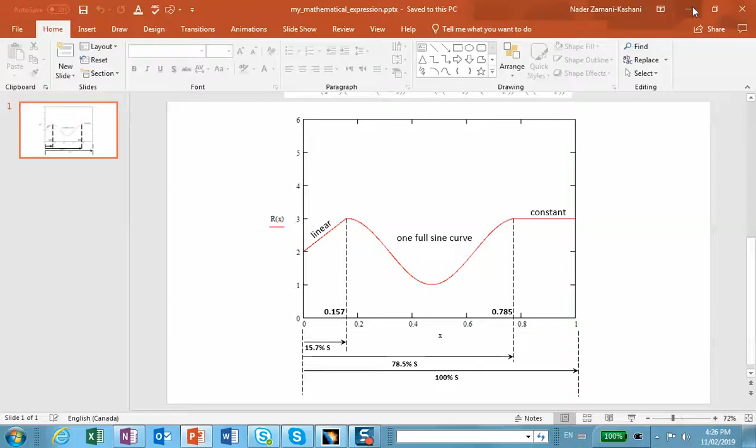Okay, so let's go here. We create a part file. So Control N, P, part. And then we are already in the generative shape design. What I would like to do is to create a law, which can be done either here by going to the knowledge toolbar and then going to F composite G, or you can also go to the knowledge advisor and use the same thing there. This is law number 1.

Now, as you can see in the drawing there, you have two variables. One is the percentage along the length of the center curve, which is real, non-dimensional really, and then the vertical axis is the radius, which I'm going to use inches for. So I introduce two parameters here. One of them is a length type, and I'm going to call it big R, which is the radius. Okay, apply.

And then I'm going to do a new parameter of the type real. I'm going to call this thing x, percentage along the arc. "The law must compute one and only one formal parameter." Okay, fine. I don't know why I'm getting that message, but that's okay.

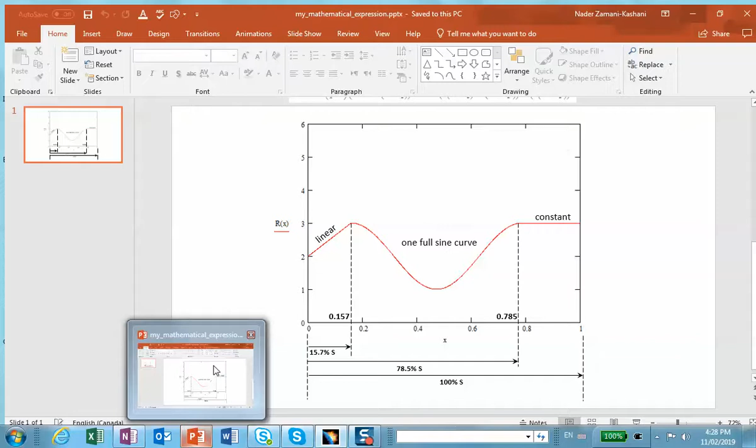So if you look at this sketch, if x is less than 0.157, then it varies linearly according to the equation of this line. Now, I have to be blunt with you. When you are doing things like this, you may have to think carefully about how you're going to write it, how you're going to non-dimensionalize things. So I'm going to write it the way I did it, and if you have a better way, that's fine.

So if x is less than or equal to 0.157, then the radius is equal to, now first of all, keep in mind that the unit of the radius must be length, so inches. So I write a bunch of things here which are non-dimensional, and then I multiply it by 1 inch to turn it into whatever I have in mind.

So 2 plus x divided by 0.157. This is a non-dimensional entity, and then multiply it by 1 inch. Notice what this says is that when x is 0, radius is 2. When x is 0.157, then radius is 3 inches. Okay.

Else, if x is less than or equal to, let's see now, 0.785, then the radius is given by that full sine wave that you saw on the PowerPoint slide. So we're going to write it down. 2 plus sine of x, multiplied by, now notice that the argument of sine must be in degrees because my unit is in degrees, okay? So whatever I write after sine, when the parenthesis opens and the parenthesis closes, must be in degrees.

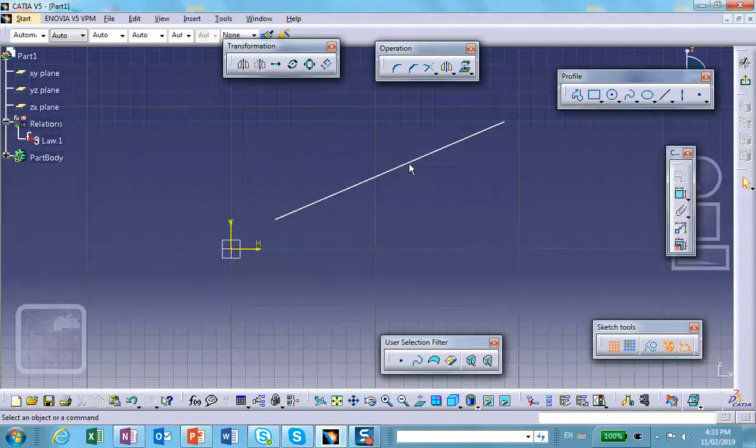For now, I'm going to make it a line right there. Okay. I don't know what the length of it, and I don't care. In fact, I'm going to change this thing later on to an arbitrary curve. So exit. Now we do a sweep, which was right here. Circle, center and radius. So the center curve is right there, and the radius is not a constant, but it's following my law. So I click on the law.

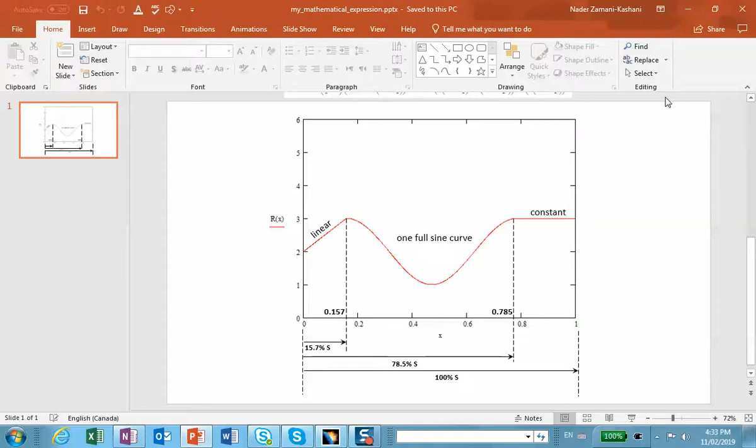Okay. And then I say advanced, right there, and this is exactly the shape that I have on my slide, right there, linear, full sine wave, and a constant, and the numbers are agreeing with what we had there. So remember, you need to select advanced. You have to select the law that you created, and then okay.

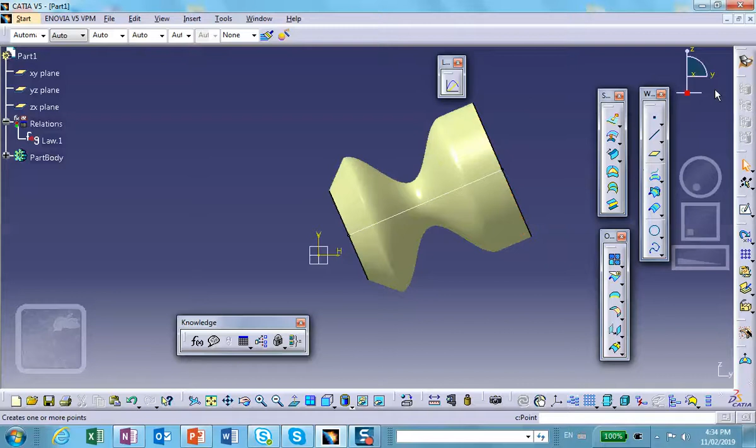All right. So if you look at the front view, we see exactly the scenario: a linear variation as a function of arc length, a full sine wave, and then a constant. Now, a couple of things. This thing did not actually have to be a line. So let me go back to that sweep. Let me go to that sketch. I'm going to delete that and make it a spline. Spline right there. Exit.

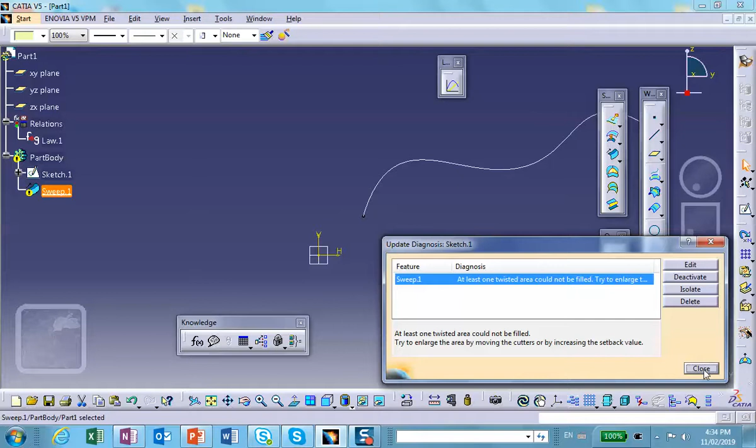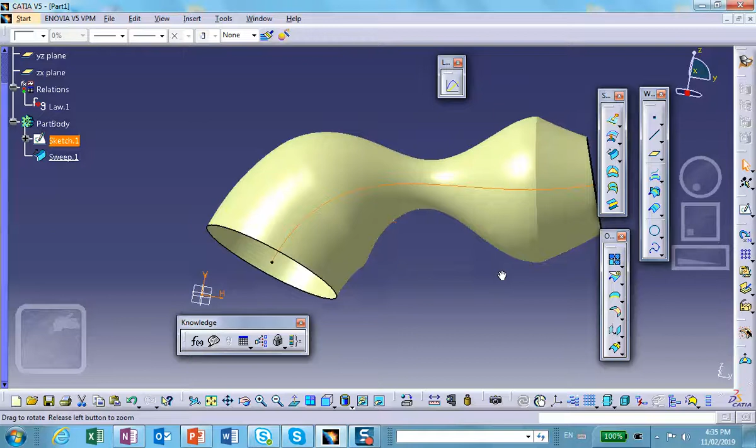Well, it looks like that was too much variation. So let's go back here and let me change this thing to a different spline, a simpler one. Yeah, something like that. Exit. There. So if you look at it, at one end the radius is 2, then it's a linear variation. You can see that. Let me turn this thing around so you can see it. So it starts at 2, linear variation, then it's a full sine wave, and then it goes to a constant.

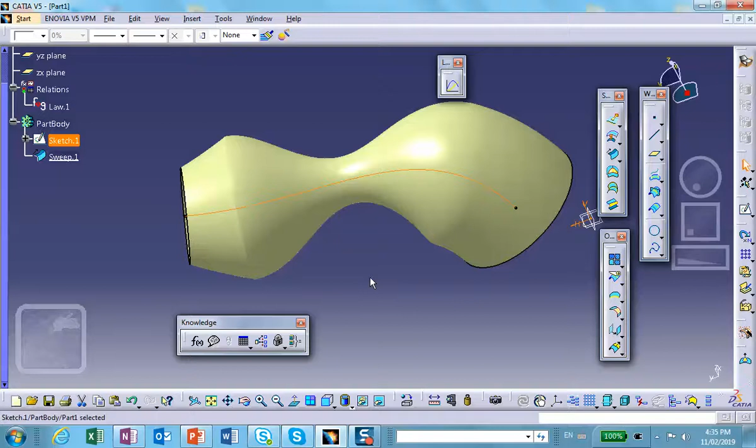Okay, now there's something that I would like to do for you, and that is, in fact, let me do the following. Well, I'm going to stop here, okay, because this really describes the process of using a mathematical expression right there, writing a conditional program, and then creating the surface that we want.

Now, in my final video on this topic, I'm not interested in the surface. I just want to have a curve in space which follows this specification, okay? Because right now it's cumbersome to show that based on what we have done. So I'm going to stop this, and I'll do the third segment next. Okay, so.